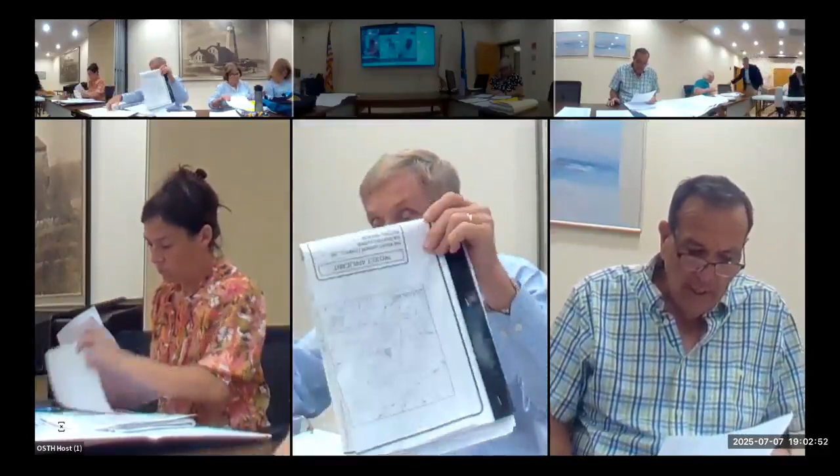Mount Vernon Company application for special exception use for an oil change facility at 1333 Boston Post Road, map 27, lot 24, Gateway Business B4 District. Owner is Morgan and Molly LLC. Applicant is Mount Vernon Company. Agent is attorney Edward Casella. Action is to be closed by July 7th, 2025, or no later than July 20th, 2025.

I'll make note at this point that I was absent from the last meeting. I did read all the materials and watch the video from our last meeting, so I feel confident I can partake this evening. Before I turn it over to you, there were, from the recording, a number of missing elements in the application, and I just want to go through those.

The application was missing, as Chris called it, the colored sheets. We had the coastal site review, we had CRAD, statement of use, the floor plan, the landscape plan, photometrics, traffic study, site plan, and additional photos — all of which we do have for this evening.

Attorney Casella? Good evening, Ed Casella, representing the Mount Vernon Company. Rick Howes is online, Damian Fox is here in attendance, and Joe Wren, project architect, as well.

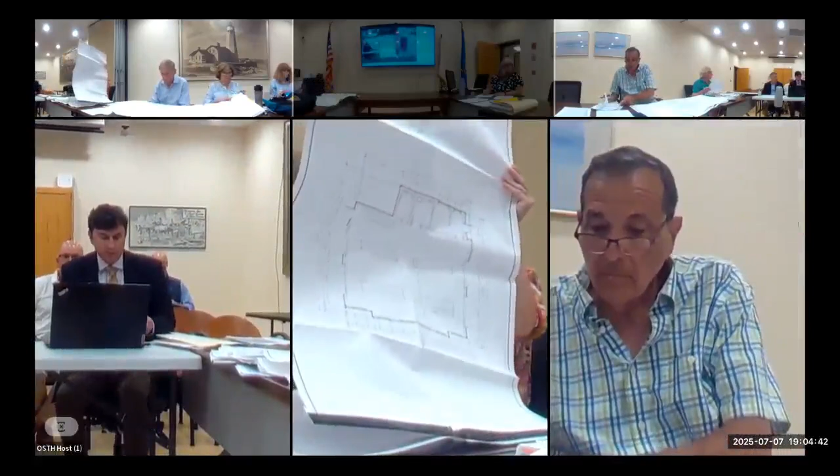We worked with the town to make sure that everything is not only online but in the packets. I think one thing came into the file after the packets went out regarding traffic — there was a response last week on July 2nd, back and forth between the traffic consultants. Our consultant submitted a response, and then we did get a response letter back from Greg Del Rio.

This needs to go into the record. It was submitted to Chris and Sarah online. We did get these electronically, I believe. You probably did, yes. You got one brought to the meeting.

As I said, I noticed that today a July 3rd letter came in with the final conclusion. We concur — you all have the July 3rd letter? Yes. We concur with the findings of the traffic study that the proposed development will not have a significant impact on surrounding roadways and intersections, so hopefully the traffic review can be closed.

Again, we're not going to go through everything that was discussed at the last meeting, but this is an application for development of a motor vehicle repair facility at 1333 Boston Post Road. There were a number of questions and clarifications regarding the plans that I just wanted to run through with you to show the changes made in the submitted materials.

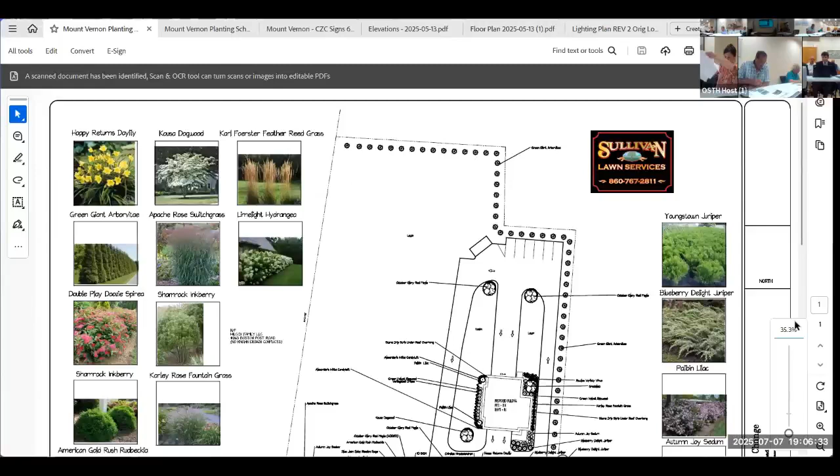If you have questions, we can drill into that a little deeper, but I figured this was a good place to start. The first related to the landscaping — there were comments at both the meeting and in Jeff Jacobson's letter regarding landscaping. A new street tree was added to the landscaping plan to comply with the comments. There was a further comment in his letter that the plan should have a modification date on it, so there is now a revision date.

If you look on the right-hand side, you see Route 1 Express Oil Change, and further to the right there's a revision that says revised 6/23/25, on the landscape plan.

Two trees added, two street trees. Or a total of 5. Total of 5.

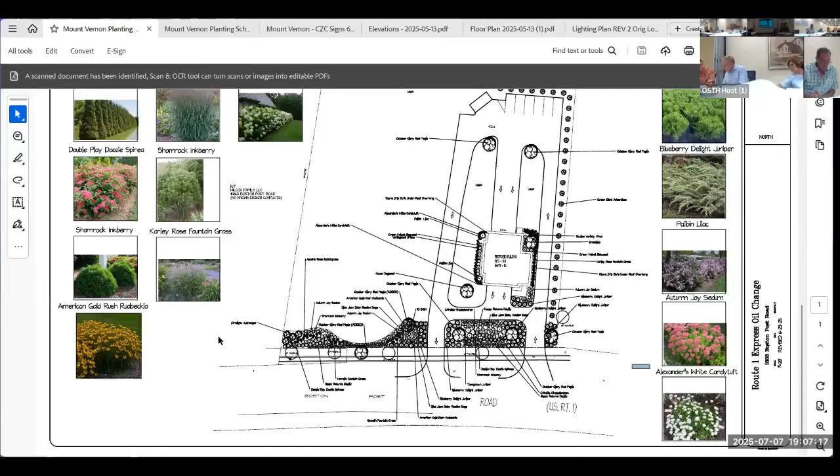Do you want to go through each point and then come back to any questions at that point? Or do you want questions after each? Yeah, we can do questions after each.

Commissioners, are there any questions regarding the updated landscaping plan? Any questions regarding the landscaping plan as revised?

Well, it's related to landscaping in that there's the entrance, the one-way entrance from Route 1 on the eastern side of the property. It crosses the property line and then passes through the landscaping as demonstrated in what we see here. And there's a 25-foot front landscaped area.

And then from that direction perpendicular to Route 1, there is an available left turn, which goes across the front of the building all the way to the western drive exit to the site. And there are one-way arrows in such a manner that once you make that left, the only thing you can do is exit the property.

And I see that portion of the access drive between the eastern edge of the building and Route 1 as useless. The entrance from Route 1 should go straight to the rear of the property so that customers can enter the building as designed. And if they do not wish to enter the building, they continue to the exit drive, which gets them out to Route 1.

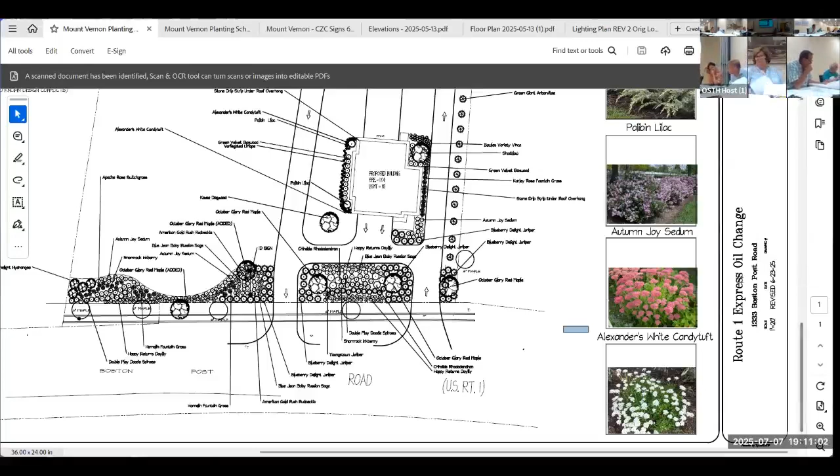Sure, please. So we do think that's essential. The operators, and Damian is there as well, they operate these sites, and if someone pulls into the site — and we don't expect this — but if the traffic was queued around that corner, and they pull in and say, I see that queue space now, I see that queue length, and I don't want to wait that long, so I'm going to leave the site.

If they made that decision, they have no other way to exit the site other than that, so it makes it safer. Also, the majority of that driveway, probably 75 or 80% of it, is required for the cars exiting the oil change facility, so there's only a small portion, 15 or 20 feet, whatever that length is, that Commissioner Friedman is talking about.

It meets the regulations, it's much less impervious than there is now. It meets the landscape requirements, there's 25 feet of landscaping in that area to meet the regulations that's currently asphalt right to the property line.

And we have another 20 to 25 feet from the property line to the edge of the pavement in DOT right of way that is also green space with grass and trees. So we have a 50-foot green space area.

That'd be great. From the edge, yes, thank you. It's from the edge of the driveway to the edge of this driveway that far exceeds any other property in this area. So it exceeds what the regulations require, and we don't see anything in the regulations that disallows that little connection of the driveway to be there.

We think it's better for traffic management, and we think it's better for safety. It's only a 14-foot wide lane by 20 or so feet long, so it's probably a few hundred square feet or less.

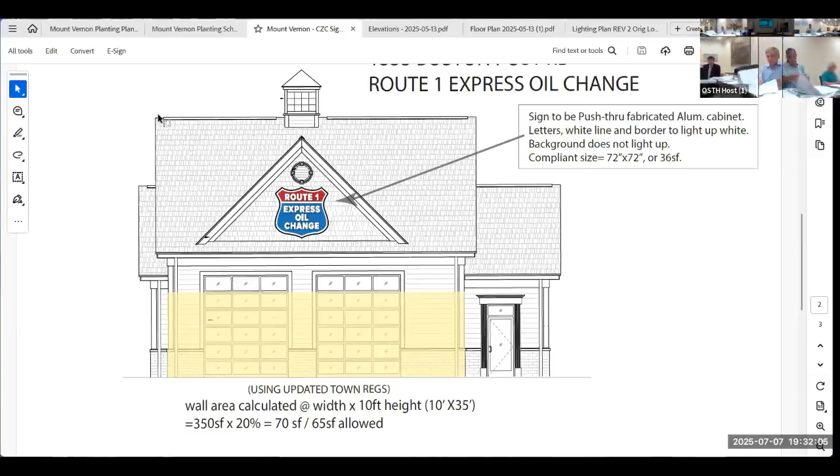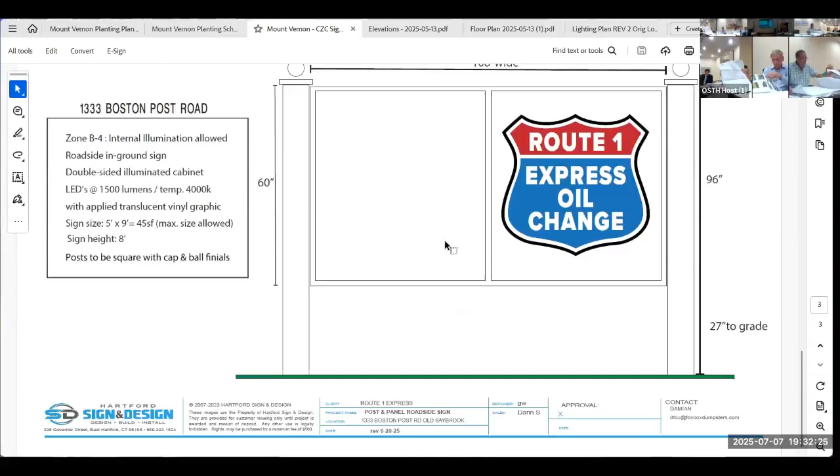The triangle gable is not more than 2 feet offset off that wall, so it's eligible to be included in the calculations under the sign regs. There was also a comment on a height dimension on the top of the building, so that's been removed on this plan, the sign plan. And there's additional calculations completing the height to the top of the finial shown on the monument sign. So those are the changes made to the signs, if there's any question regarding that.

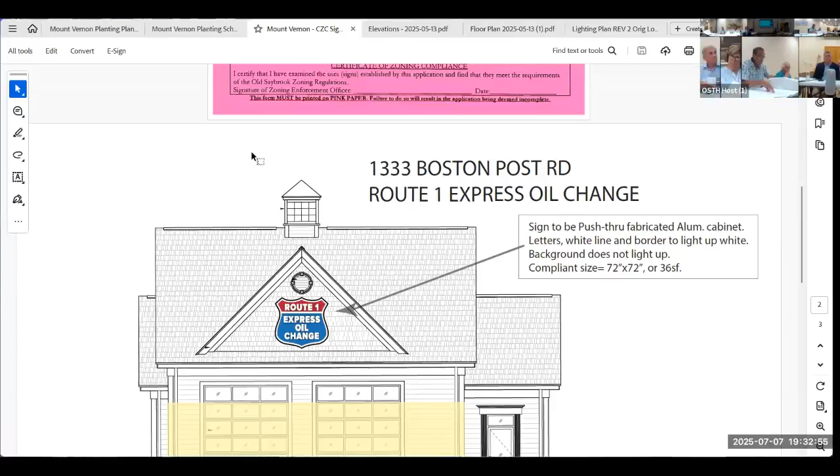No questions on the sign? Bob, did you have any questions on the sign? Yes, sir. Any questions on the signs? Well, Bob, I have a question about the plane, the wall on which the sign is to be mounted.

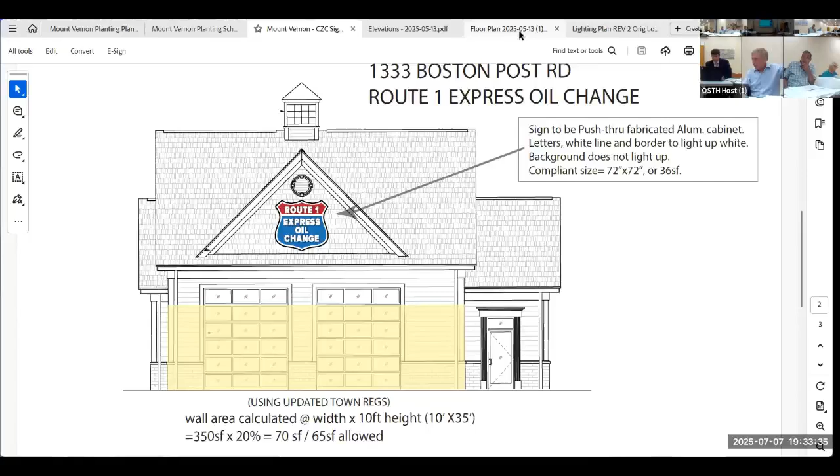I can't tell from the site elevation drawings if that wall is coplanar with the wall that's yellow on this depiction. Is that wall on the peak coplanar with the wall that has the doors in it? I can't see that wall, there's a roof in the way. I think it's here, I assume there is an eave of that triangle, yeah, and therefore it's not located at the edge of the roofing.

Where the door is, it's recessed in. How much? This door, the wall where the door is, that wall between the front wall where the yellow is and that wall, what's that dimension? It's 2 feet. Oops, sorry.

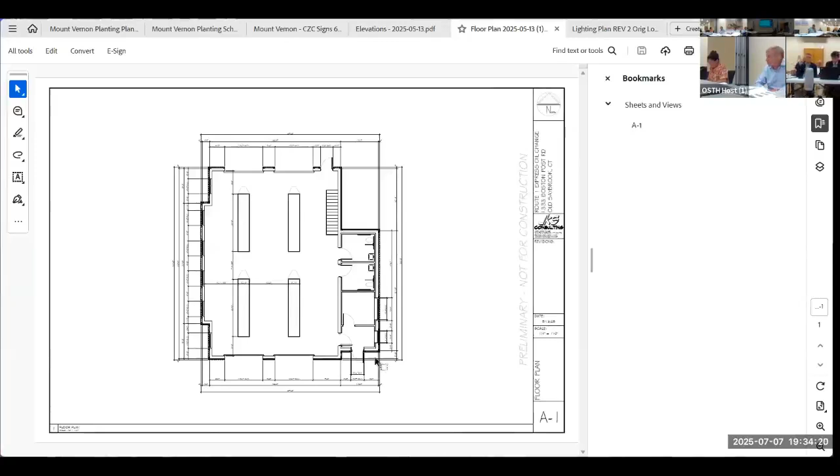It's on the floor plan, zoom in there on the lower right. 2 feet, set back here. So it shows up there, Bob, on the screen, you can see it. You can see the door is set back 2 feet. That's for the door.

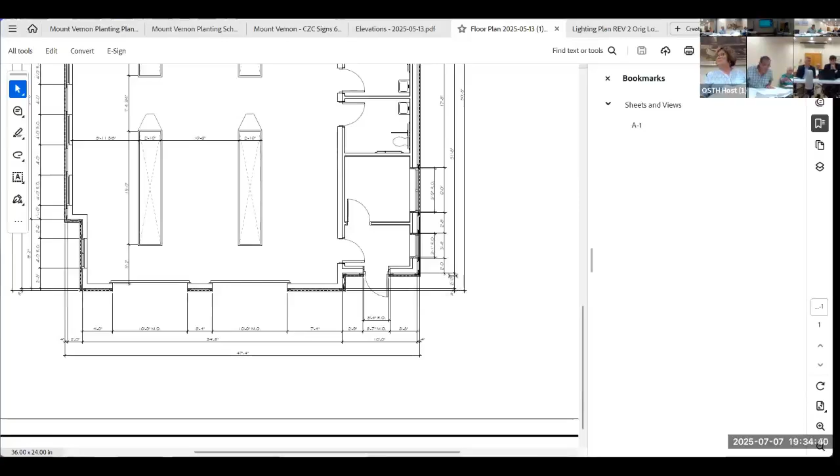I'm talking about the eave on the roof. He's talking about the eave surrounding the sign itself. Correct. Where is that in the plane? On the same plane, if you see it here, it's in the same plane as the front doors. Okay, correct. Not the large doors, the overhead garage doors.

The overhead garage doors, yes, these. Okay, you can see it on the side elevation, on the right-hand side. Here, this is the overhead garage doors pushed forward 2 feet here, and then it goes straight up. Obviously, there's a little bit of an eave separating.

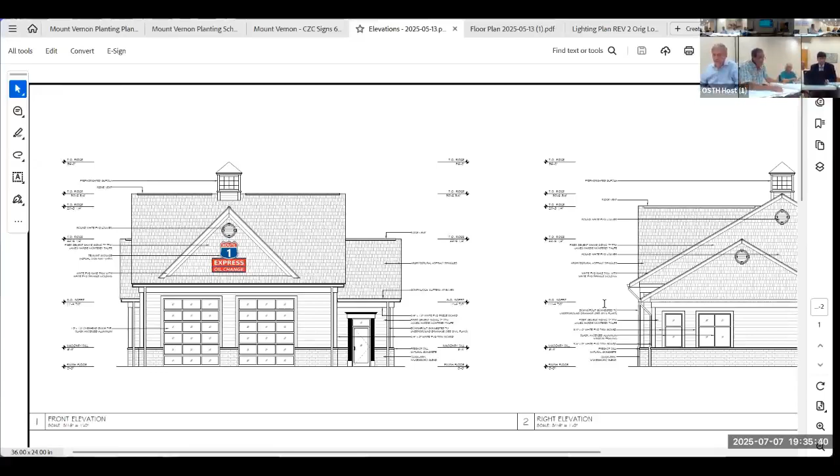Question for you while we're on, not easy to find, what's the overall height to the top of the cupola? You're showing 36.2, but the arrow points to like the middle of the cupola. Well, no, I think the 36.2 goes to the top of the cupola here, so that would be 2 inches taller than our regulation. No, cupolas are exempt, they're a certain size, non-occupiable, they're exempt from building height.

That max ridge there is where your height would apply, and then a decorative cupola can be taller as long as it's exempt. So the top of the ridge is that 30 foot 6 3/4? Yes. Is that the correct measure? Yeah. Okay.

Any other questions on the elevations? I think Bob had a question on a window. You had a question on a window? Windows, yeah. With regard to windows along the exterior of the building, on the eastern side, there's a couple of windows near a person, a pedestrian type door, and so on the eastern wall of the building, there's a couple of windows.

And then there's a jog in the building in the back 10 feet or so. So the rear part of the building doesn't have to have windows because it will not be visible from the street. And the restrooms apparently don't have any windows, and that's okay, all right?

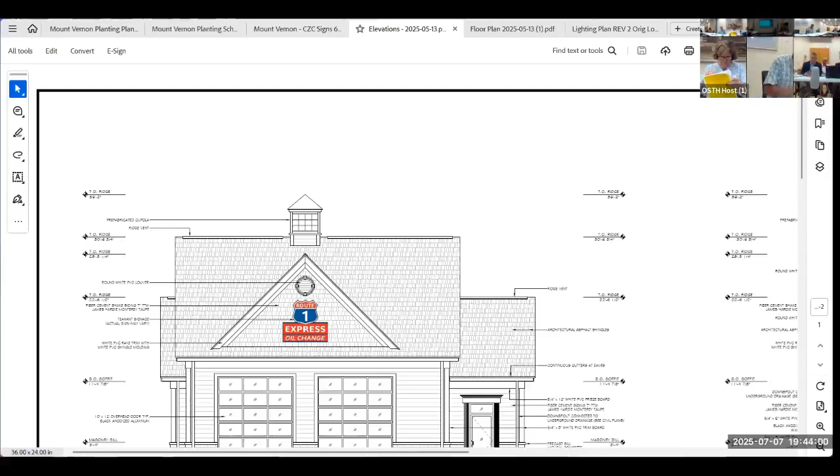Alright, go ahead, wrap us up. Do you have anything, Joe, to add? The only thing I have to add is Jeff Jacobson's comments, just a discussion so we don't forget about it, about the CAM, since this is right at the edge of a CAM area.

In Jacobson's last letter, June 24th, pretty much all the comments have been addressed. There was a discussion last time about the swale on the western side. In the northwest corner there's an existing swale with a drainage pipe, and there was some grading in that area expanding the swale to the east or northeast. He wanted us to remove that grading, even though the whole area is going to be meadow and grass, and all the pavement and building that was there previously is going away. The western driveway is really the only impervious area that drains to the western grass area, what will now be grass area. That area is uniformly graded — very flat, with just a couple feet of elevation over the entire site to the property line — so it'll be a flat grass and meadow area where runoff can evenly disperse and absorb into the ground.

Jacobson was happy with that, and that's why he says that comment was addressed. He wanted us to add a few more spot elevations in the handicap parking area, which we did, and that comment was addressed. The only remaining comments are subject to DOT approval, since it's a state road — we already met them on site. Comment 4E was about the parking spaces, a statement saying he's comfortable with using what the traffic report requires, which is what we have — 6 or 7, we have 7 proposed including the handicap space. Comment number 7 says addressed, but he talks about the planting schedule and asks about the revision date, which has since been added. Ed pointed that out before, so all of Jacobson's comments have been addressed.